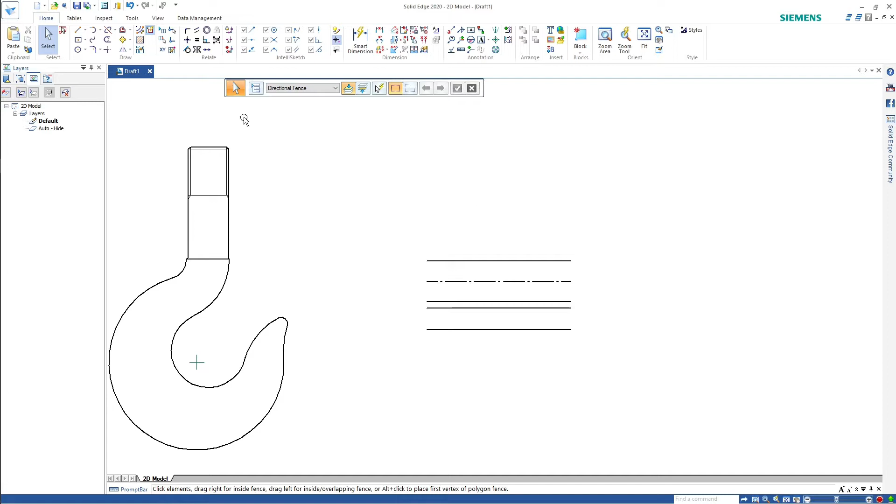Now from here, we'll just pick the center line. We're going to offset that. Half of 72 is 36. And 36 plus 6.5 is 42.5. And 45 mil being half of 90.

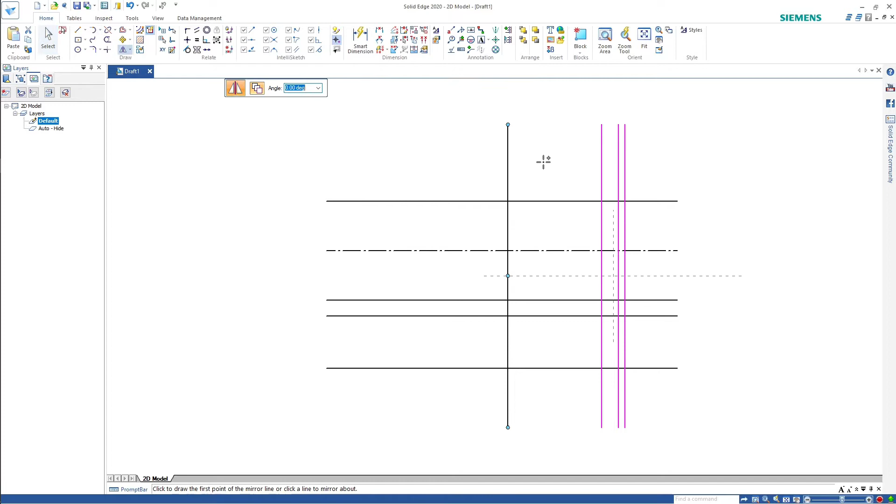Let's just now mirror those 3 lines about the center mark. Let's just check that I'm accurate. Okay, good. So that's essentially our outline. Let's once again mark that as a center line. And let's just delete the stuff I don't need.

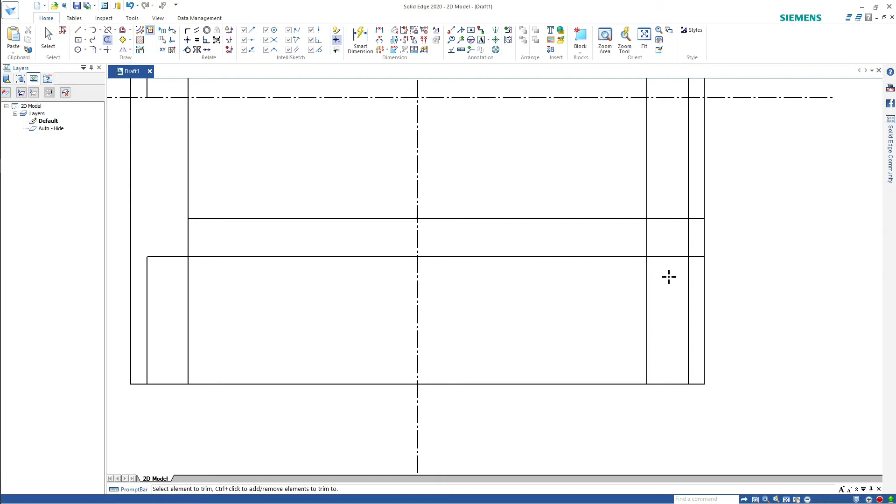Now we'll just go through and remove that and remove that. I'm just copying what we're seeing in the text. Now once again I'll just mirror that center line.

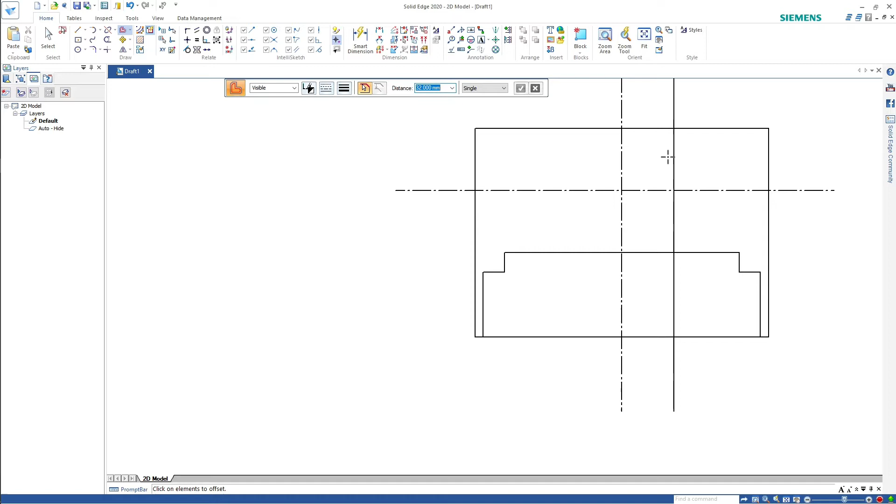Drill 32, so that's 16 both ways, and oddly enough that's our - I said it was an M36 by 4mm thread. So there's the 32, and let's just offset that by 2mm. That one can come out here, that one can come out there. Done.

Now in there we've got a hole for a diameter 10 taper pin.

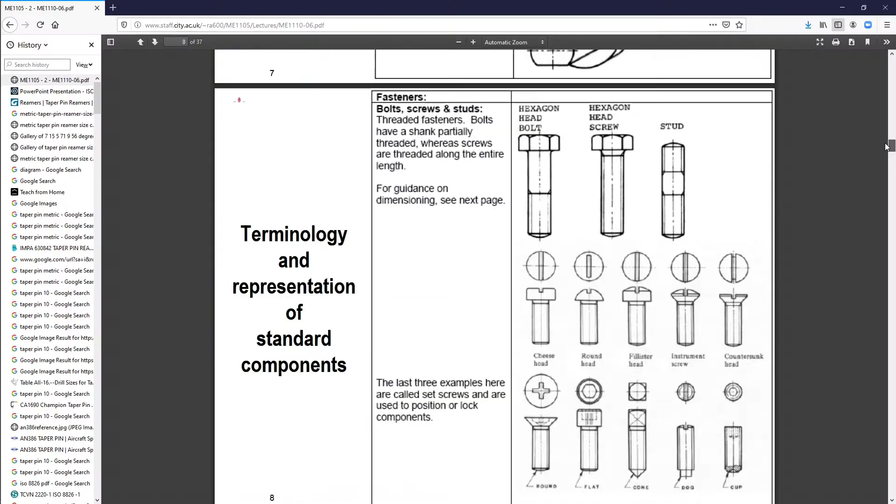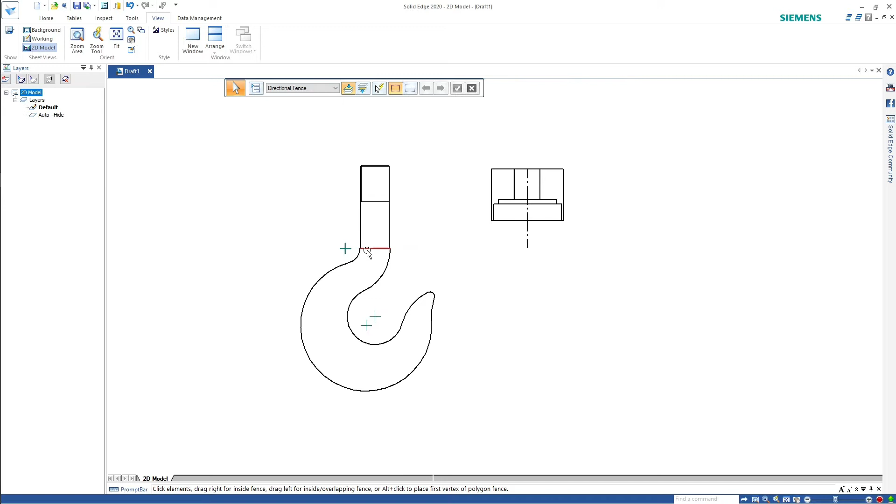Okay, I'm back again. I've actually lost everything and I've had to redraw it. I've cleaned up that collar on the hook so it looks okay now. There's the nut. I think that's about the point I was at. That's 19mm down.

That I'll change to a center line. And let's just extend that out a bit. That hole in there has to fit an M10 taper pin.

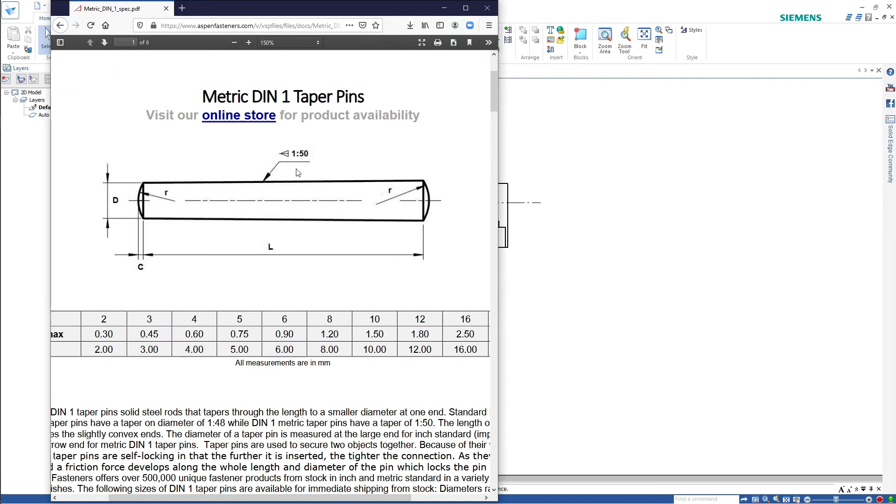So what's a taper pin? I actually had a look and here's the spec. There's a symbol that has not been in the exam that I'd like you to know. Taper 1 in 50. The slope on that decreases. Every 50mm it decreases 1.

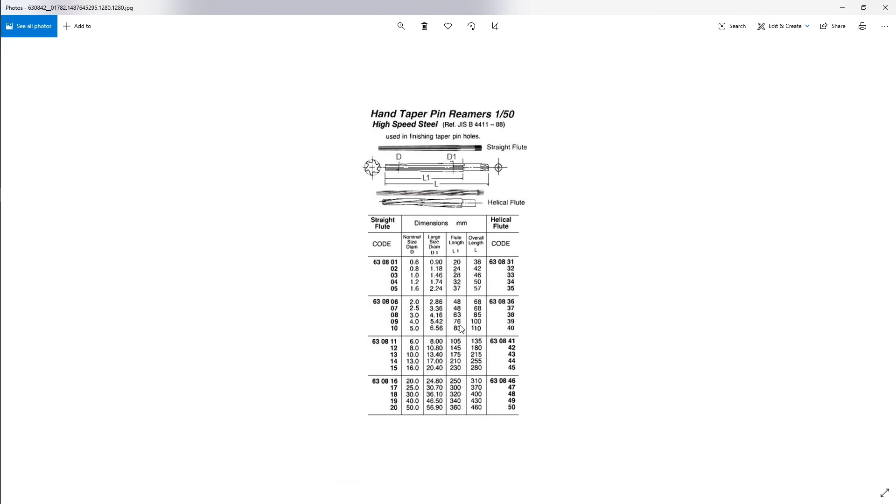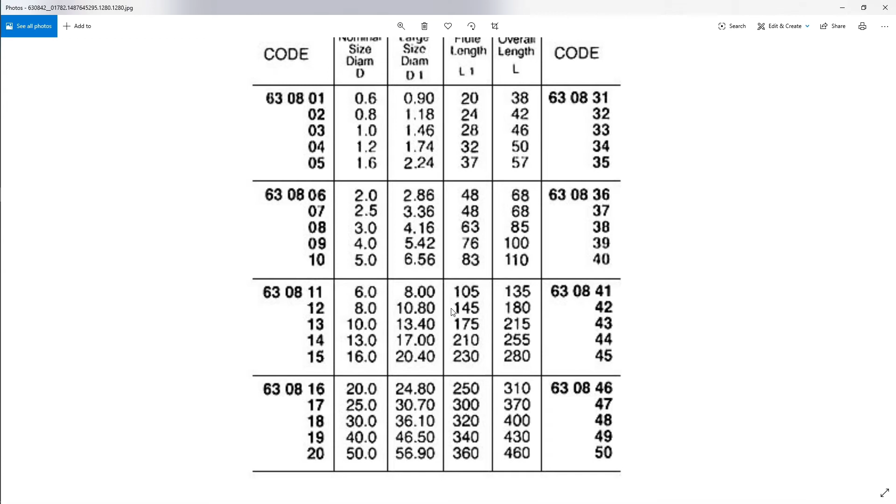Here you go, there's a taper reamer for finishing tapered holes, as you can see. M10 starts out 10. Flute length is 145, starts out 10, finishes 8mm, about 100mm later. So 100mm long, it disappears 2mm. Or 2 and a bit mil because that's 145mm long.

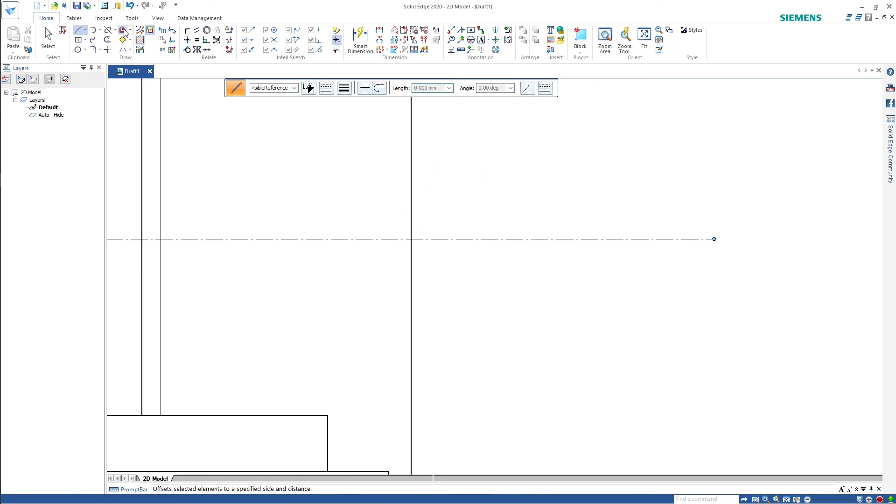Let's now start out with our taper. That's 90mm long. It should offset that 5mm up. For every 90mm, it decreases by 1.8 in diameter, which is 0.9. Done. So that is a taper pin, or 1 in 50 taper.

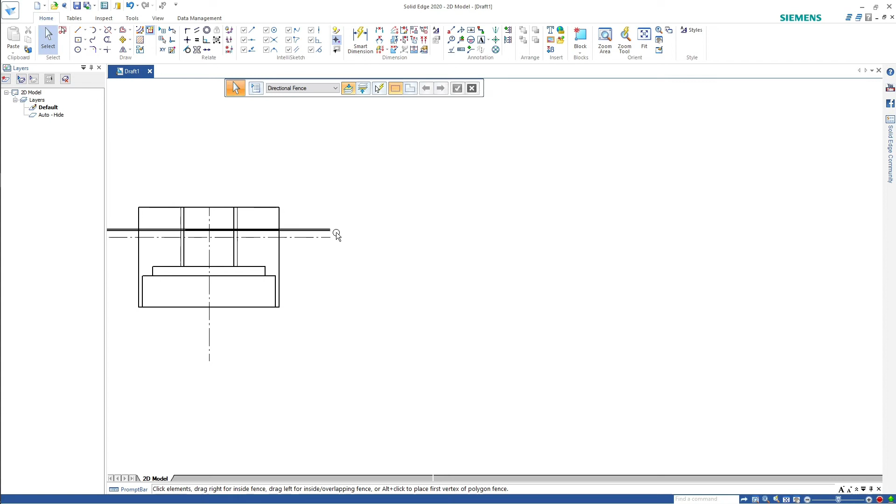Let's just select those 2 now and just remove them. Like so. There's our taper pin drawn in there. Now it says it's 95mm long.

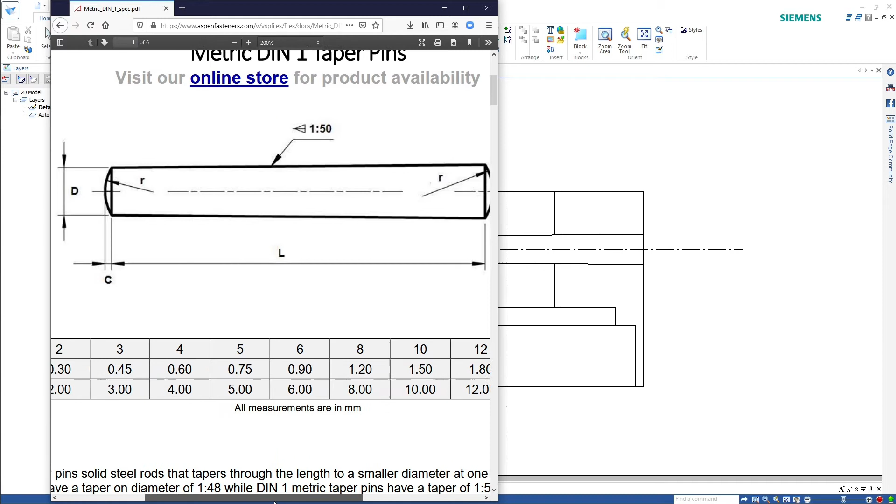If I have a look again at our spec for a taper pin, radius is for a diameter 10, a 10mm radius on both ends. The length is 95mm with a 10mm radius on both ends. Technically that should not be exactly 10mm. I'll actually just bring those across 2.5mm.

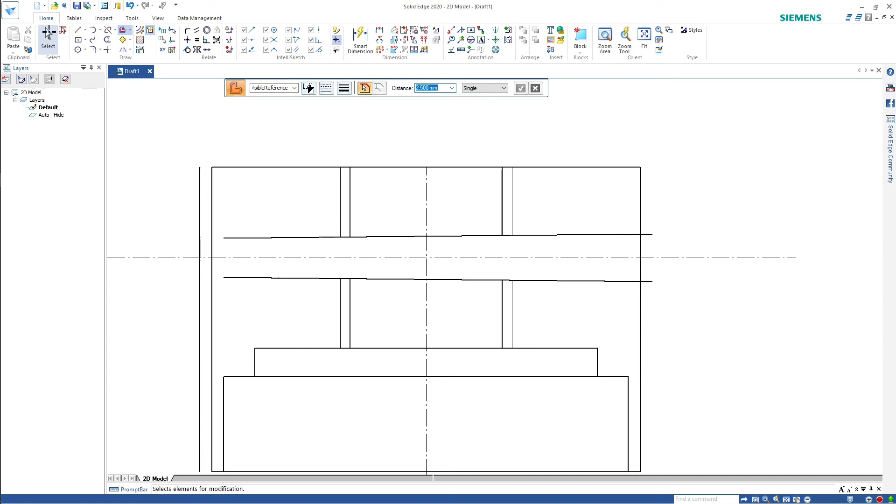Let's just offset this by 2.5 as well. Comes out there. And that comes out to here. That's got a radius 10 end on it for the taper pin. Radius 10, which means that that's there.

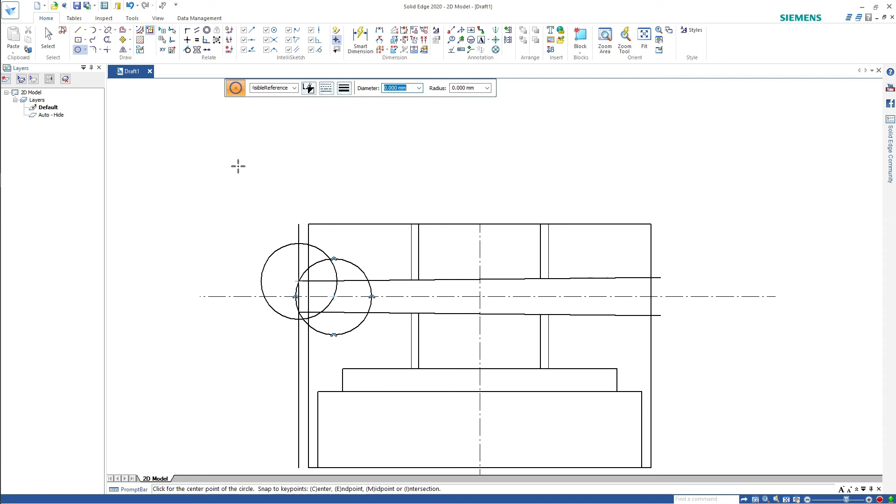And I'm going to just, no, I can't invert that. So let's just - I was going to mirror that across, but that won't work. Radius 10, let's just draw in a radius 10 pin end from there to there. Now let's just clean it up. There is our taper pin with a 1 in 50 taper, like so.

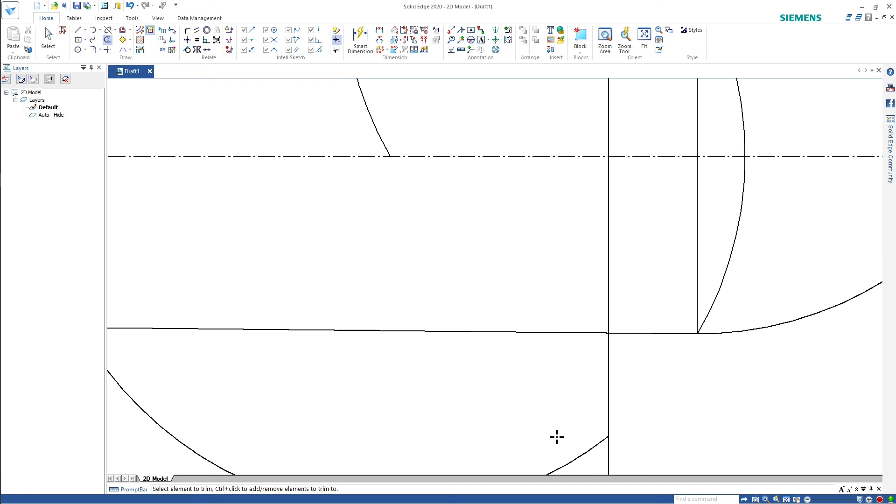Let's just now clean this up. Done. There's our taper pin actually in the hole there. So let me just copy that so we don't lose it. Copy that and paste it up here. Hopefully that's still centered. Yep, still centered.

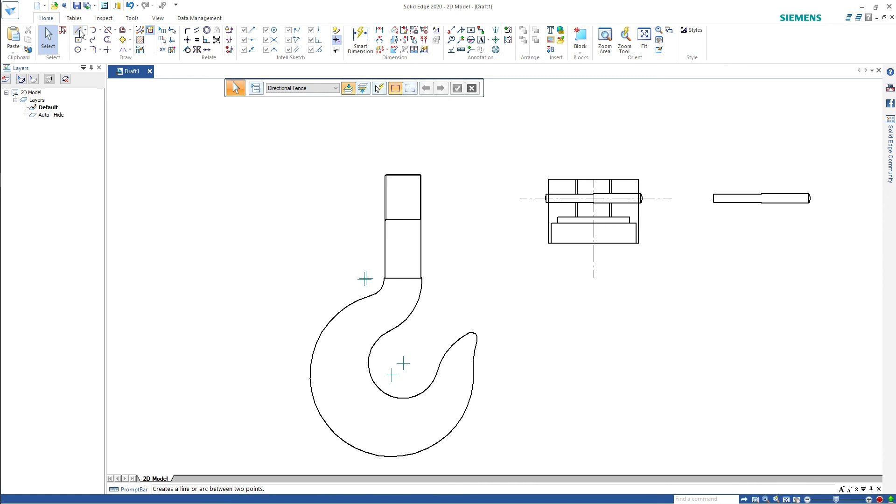Okay, so there's the nut drawn. I'll just extend that hole across, or the thread across. Okay, so there's the taper pin all drawn.